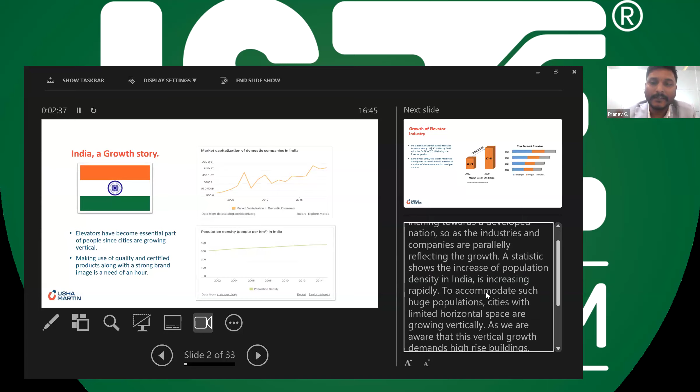All of us are aware that India is inching towards becoming a developed nation, so industries and companies are also growing parallelly and reflecting that growth. A statistic shows the increase of population density in India is increasing rapidly. To accommodate such huge populations, cities with limited horizontal space are growing vertically. As this vertical growth demands high-rise buildings, elevators have become an essential part of people's lives. Hence, making use of quality and certified products along with a strong brand image has become a need of the hour, right? So here we want to show some data regarding the growth in the elevator market.

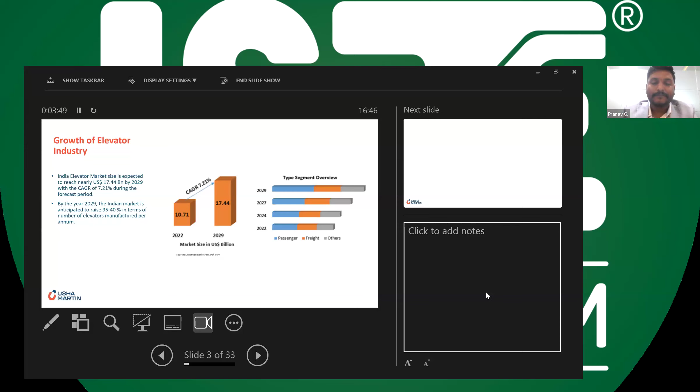Here you can see that in 2022, the market size was estimated at 10.71 US billion dollars, whereas in 2029 it is projected to be at 17.44 US billion dollars. So there is huge potential in the elevator market industry, and that introduces more and more players, resulting in competition in the market. If there are more players and more competition, the market tends towards cheaper products. So we have to see whether we are using a product which is reliable, quality tested, and safe in our elevator system.

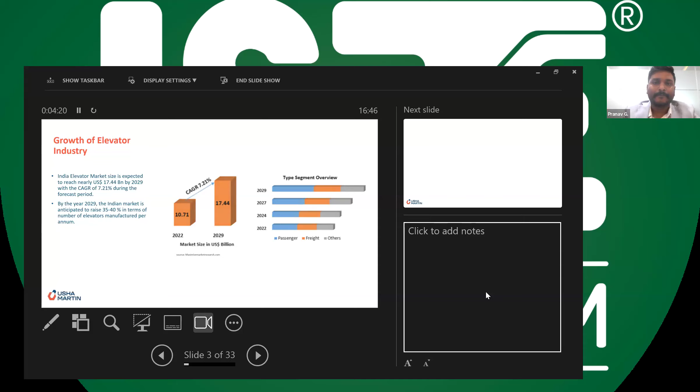So for that reason, we are here to educate you, to make you aware what to see about wire rope, how wire rope has to be identified, what particular applications need to be checked if I'm going for a certain construction of wire rope, a certain characteristic of wire rope. So here I have made one slide showing number of mishaps due to elevators. It's our moral duty to make you aware on safety product, that is wire rope, especially in steel wire rope and elevators.

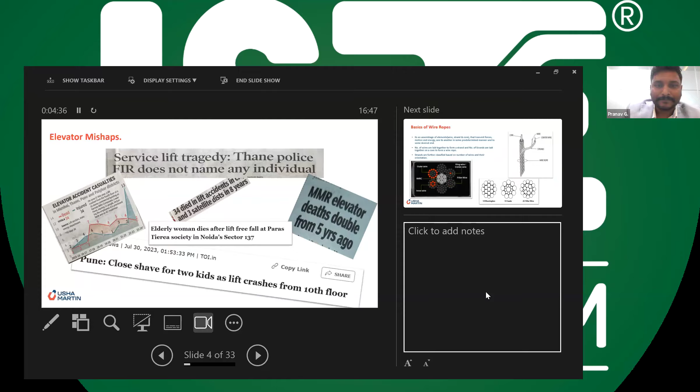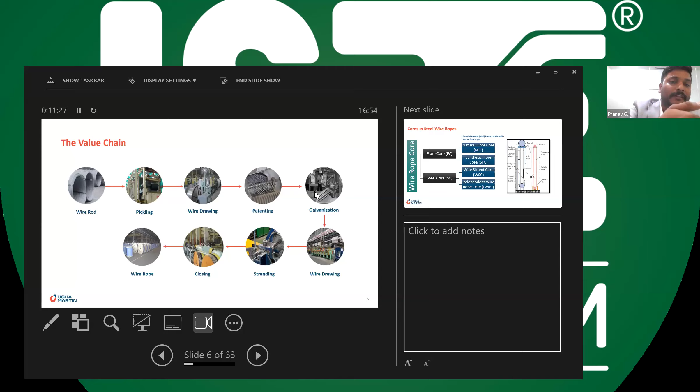As I mentioned earlier, strand is made up of wires. These wires are laid into a machine known as a stranding machine, and we get a strand out of that machine. Based on requirement, let's say I need an 8-stranded wire rope, so I need 8 strands and a core. Once I have 8 strands, I take these strands to the closing process, where we lay these strands over a core to make the final product, that is the wire rope.

So why have we given this particular name, the value chain? Because if there is a single mistake or deviation in any of these processes, the desired output is not up to the mark, or what we call a quality product. Over the years we have gained experience ensuring that in each and every process the required parameters are checked and met with the concerning governing standards, and we ensure that the wire ropes manufactured are of top quality.

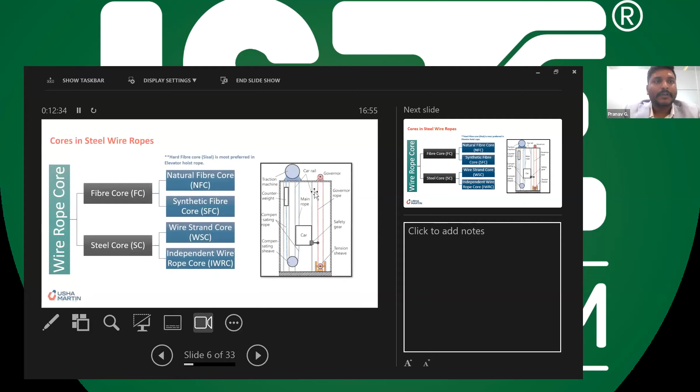Coming to the next topic, that is core in steel wire rope. As I mentioned in the very first slide, the core is the central part of your wire rope. There are two types of core: fiber core and steel core. As the name suggests, fiber core is made from fiber, and steel core is made from steel wires.

Fiber core is further categorized into natural fiber core and synthetic fiber core. Natural fiber cores are those made from naturally available plants like sisal, manila, and jute. Synthetic fiber cores are the artificial ones like polypropylene, polyamide, etc.

The other type is independent wire rope core, that is IWRC. So you must all have encountered this.

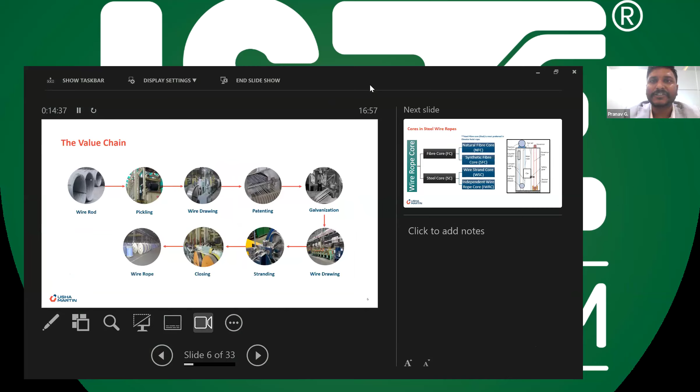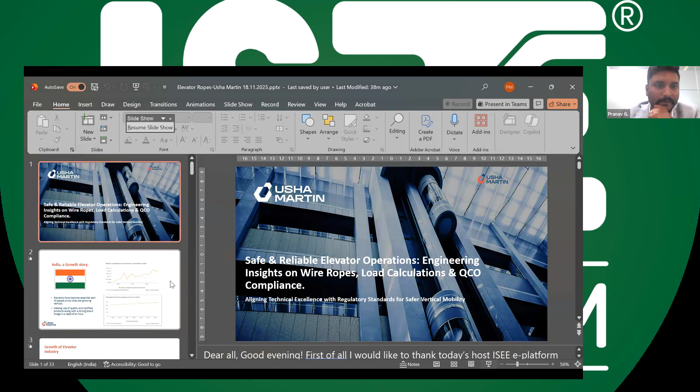I think the slide went off. Once you're sharing it now, Pranav, just try to make your screen a bigger view for the audience, because the view you're checking is a smaller version. Everybody may not be able to see the drawings and the structure there. Is this okay, ma'am? This way I can see the notes and everything there. Is there any option showing? Just a second, I'll check. I'll stop and reshare it. Yeah, choose that option. Correct. Let me share it once again. No problem, it happens, it's completely fine, Pranav. Not to worry.

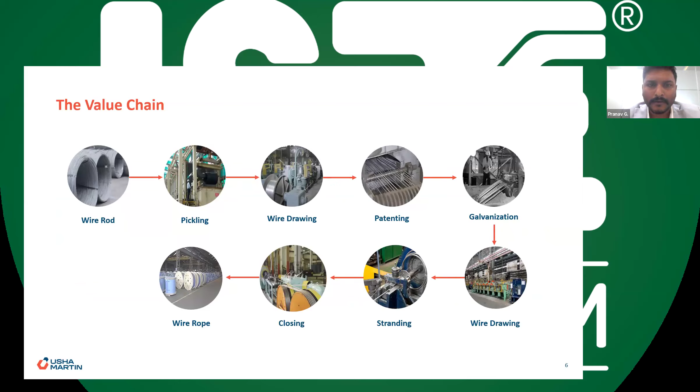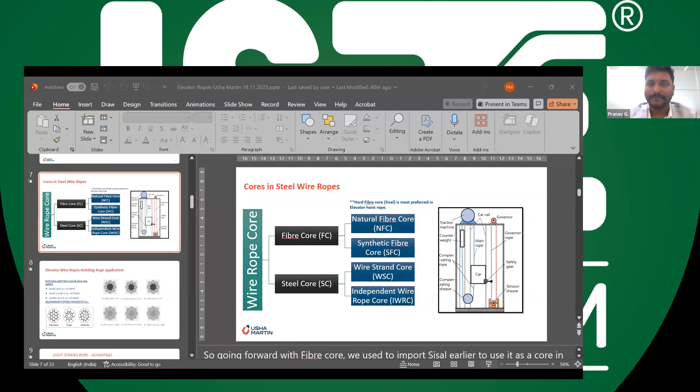Is my screen visible now, ma'am? Now it is visible correctly. Yes, now you can proceed with your presentation notes, go ahead with whatever presentation you need to do. Is it okay? This is fine. You need to press the slide show button, I think it's the extreme right button, just a second. Or you can go in the view also. I'll go with another view. I think this one, yes. Now you can press the arrow keys to go to the next slide. Correct, yes you're right.

So I was talking about fiber cores, types of fiber cores used in elevator wire ropes. Natural fiber cores come from jute, sisal, manila - these are plant-based fiber cores, and cores made from jute, sisal, manila are categorized under natural fiber cores. For synthetic fiber core, which are artificially made or man-made, polypropylene, polyamide, polyethylene - those types of cores come under synthetic fiber core.

Coming to the steel core, it is also categorized into two parts: wire strand core and independent wire rope core. Wire strand core is nothing but if my wire rope has a core which is similar to the strand, we call it a wire strand core.

Independent wire rope core, or IWRC.

Coming to the natural fiber core part, earlier we used to import sisal from various countries to make the fiber core or natural fiber core, particularly for our elevator wire ropes. But looking at the quality requirement, we did backward integration and are now self-sufficient, producing our own natural fiber core, that is sisal fiber core.

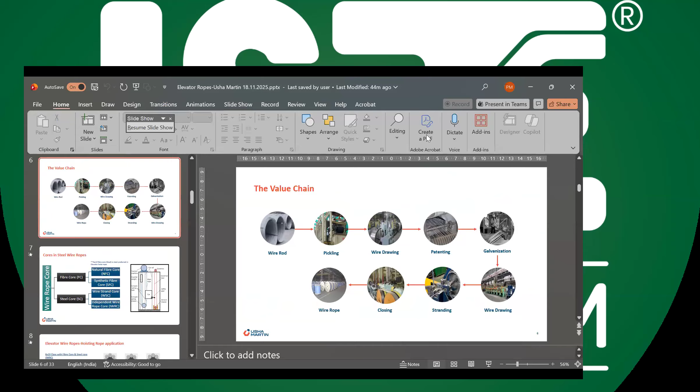Use any arrow button, Pranav. Yeah, it should change the slide. Just a sec, just a sec. Can I just reshare? I think I'm facing some glitch here. Yes, you can reshare, no problem. It should just run from the first slide or the last slide which you shared. Or if you wish to share the slide with me, I can share it from here.

Yeah, this was the slide.

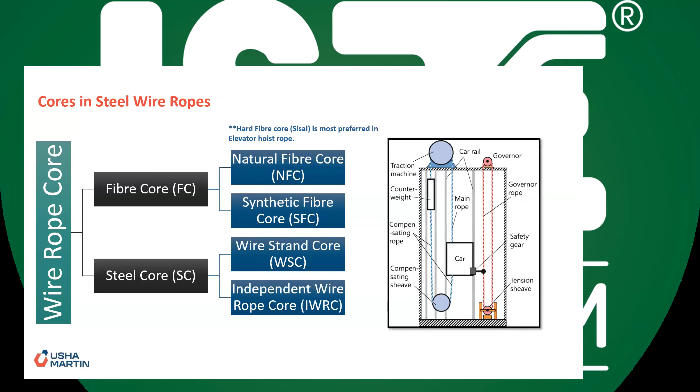I'll share my presentation with you. I'm facing some glitch, ma'am. No problem, please send it to me. I'll have it shared. Everyone, please be patient. He will be sending the slideshow to me, and I will share it from my end here. Please be patient and please be available.

You send it to me, Pranav. Yeah ma'am, I have shared the slide with you on email, I'll check. Just hold on please. I'm retrieving it from my email. Just hold on, you shared on the email, right? Yes ma'am. Okay, just hold on. I haven't received it as of now. I'm waiting for it.

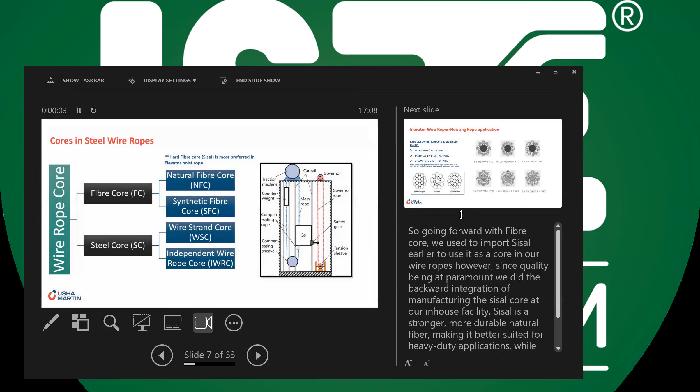There is some technical error happening at Pranav's end. He's trying to share this presentation with me. I haven't received it on email as of now, waiting for it. Pranav, you have shared it with me on email, right? Yes ma'am. The file is pretty huge, I'm yet to receive it.

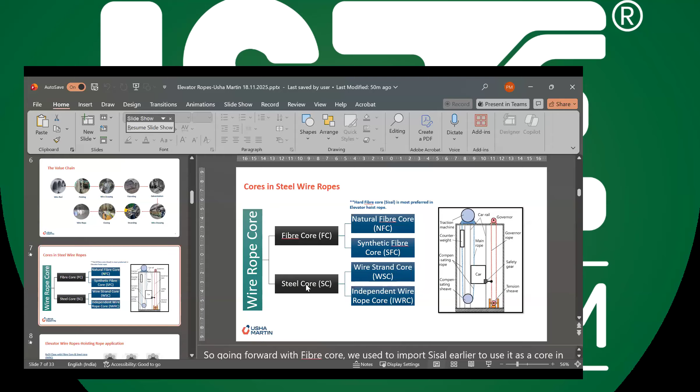I hope it is working, ma'am. I think so. You can go ahead with it. Is it going okay now? Yeah, okay, sorry for the interruption.

We do recommend using 8 stranded wire rope, especially for hoisting applications, because we have seen people using 6 stranded wire rope in place of 8 stranded wire rope. Although standards do recommend making use of 6x wire ropes particularly in hoisting application, based on our experience, we always recommend using 8 stranded wire ropes in place of 6 stranded wire ropes, especially for hoisting application.

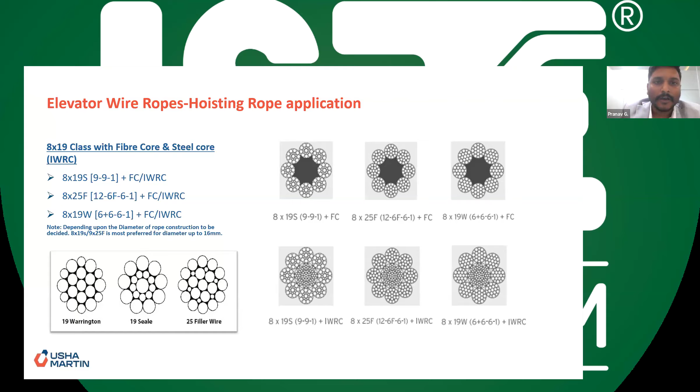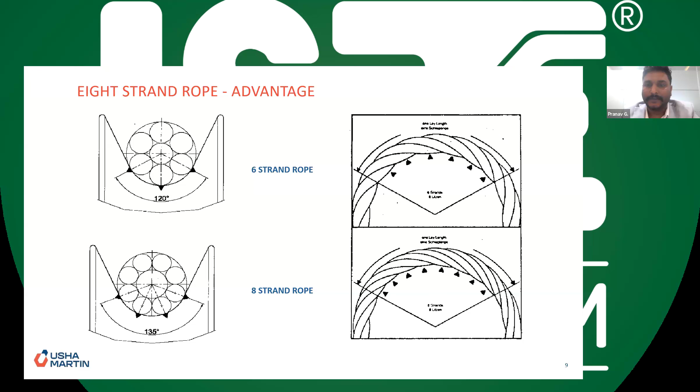Coming to the next, that is 9 stranded wire ropes. So we have seen 8 stranded wire ropes performing in hoisting applications, with your fiber core as well as with your steel core. But we have introduced 9 stranded wire ropes especially for the domestic market, because we are having successful performance, as we have already successfully tested this 9 stranded wire rope especially for your high rise buildings in the export market.

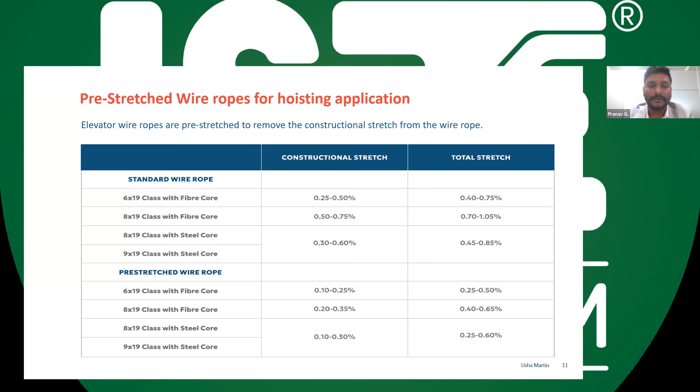Now coming to the safety factor for load calculations, I would like to give a disclaimer regarding these formulas. All these formulas are available in IS 17900. I have also mentioned the source from which I have taken this formula, so it will be easier for you all to access those standards, to go to those formulas, to understand them, and then to calculate the load calculations or the safety factor calculations in your elevator system.

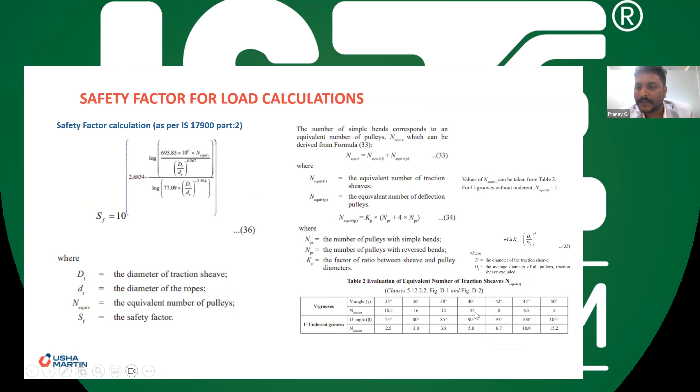I have also shown some examples from the same IS 17900 for better understanding of how these formulas work. Here you can see the first example in which there are two pulleys, one deflection pulley. They have given that the angle of the pulley is 40 degrees, and N equivalent is 10, because for V grooves especially we have to consider this 40 degree angle. So the N equivalent against a 40 degree angle is 10.

Kp is again the formula of diameter of traction sheave to the average diameter of all pulleys. Here the diameter of the traction sheave is 600, and the average diameter of these two pulleys is 500, raised to the power 4, which comes to 2.07. Then N equivalent P, which is kp into Nps plus 4 into Npr. Putting all the values into N equivalent P, we get N equivalent to be 14.14.

Similarly, you can do the calculations for this type of system as well as for this type of system. But to make things simpler, because these safety factor calculations are quite complex...

IS 17900 also states that if you are calculating safety factor for your elevator hoist rope, you can consider it to be 12 -- the minimum safety factor for your elevator hoist rope is 12. And if you are calculating factor of safety for your OSG, overspeed governor rope, it should be at least 8. This is a much simpler way to consider the factor of safety, and based on this we can proceed for our load calculations based on the selection of number of wire ropes into the system.

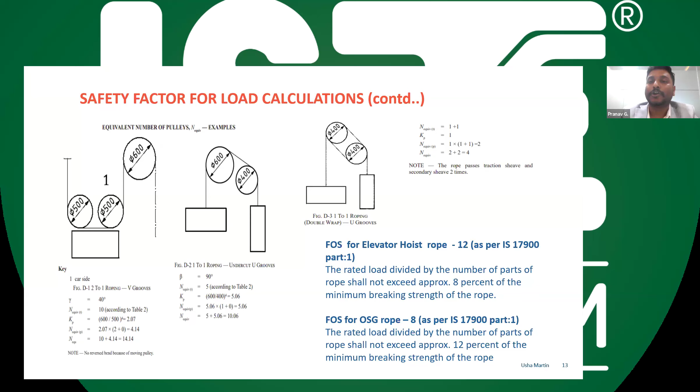Which type of wire rope to be selected, construction wise, core wise -- these factors of safety do help in selecting the right type of wire rope for your hoist as well as for your overspeed governor rope application.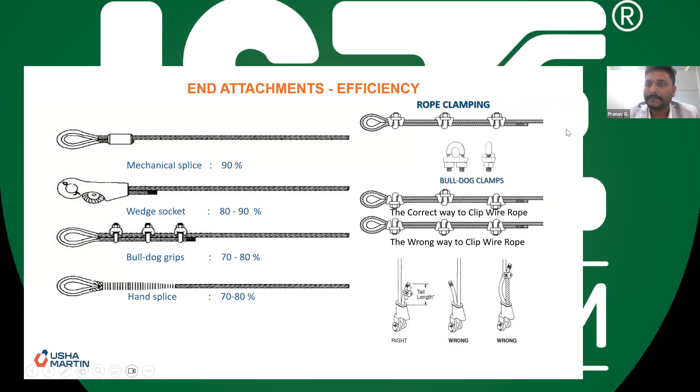Then coming to the next part, that is cutting of the wire rope. We have seen that many times people follow wrong practices, especially for cutting wire ropes. It seems like a little thing, but improper cutting procedure may lead to induction of looseness into your wire rope, which may further deteriorate your wire rope geometry, which may make the wire rope fail in its early days, or not give the expected service life.

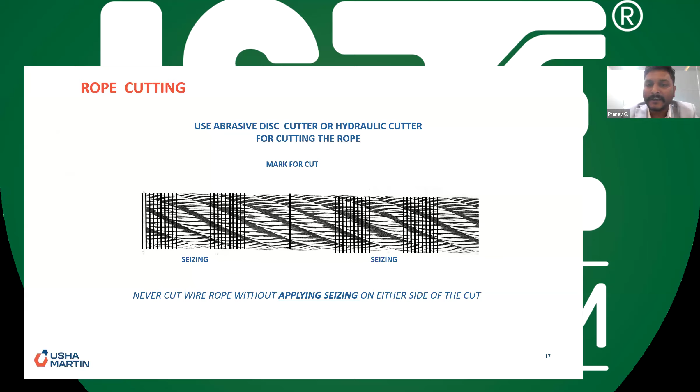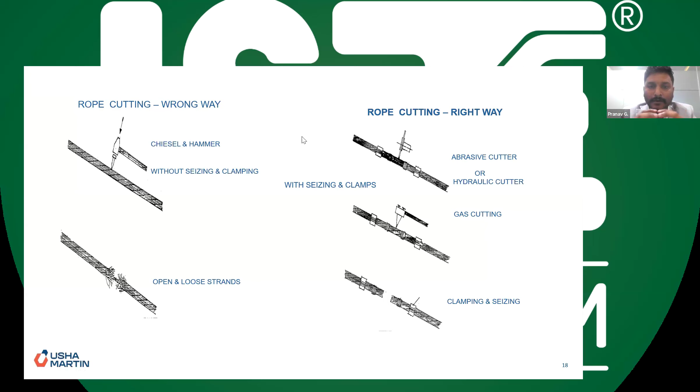So here we have shown the wrong way as well as the right way of cutting a wire rope. We have seen people using chisel and hammer to cut the wire rope, which is absolutely wrong. We request people to please refrain from using these wrong methods. You should use abrasive cutter, hydraulic cutter, or even gas cutting. But prior to cutting, you need to make sure that your wire rope has been clamped or seized at both the sides from where you are aiming to cut.

So for seizing of the wire rope, here are a few recommendations that we generally recommend based on our experience. For diameter of wire rope ranging from 8mm to 24mm, you can use 1mm wire. That wire should be annealed wire, soft wire, commonly known as binding wire. And the recommended seizing length is 2 times diameter, or minimum 10 wraps.

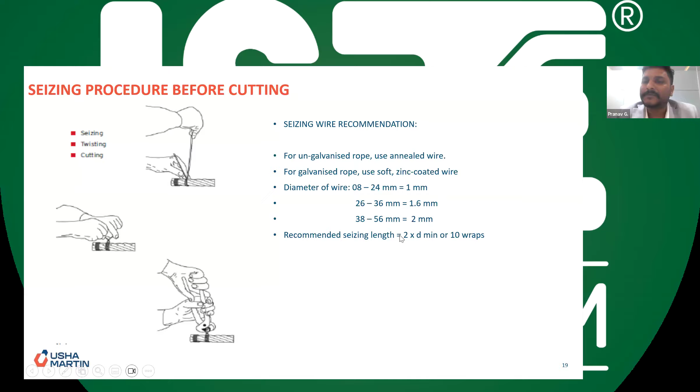People do ask me whether it is recommended to relubricate elevator wire ropes. So yes, our answer is yes, it is mandatory to relubricate elevator wire ropes. As you all are aware, the wire rope is constantly in contact with steel - your sheave grooves, pulley grooves, and various contact components. So you must have seen that the wire rope surface gets dry as the wire rope serves for a certain period of time.

If you notice that your wire rope surface is getting dry after a certain period of time, the wire rope is telling you that it's time to relubricate. But whenever you are relubricating, make sure there is no excess lubricant applied, because excess lubricant increases the chance of slippage of the wire rope on your sheaves.

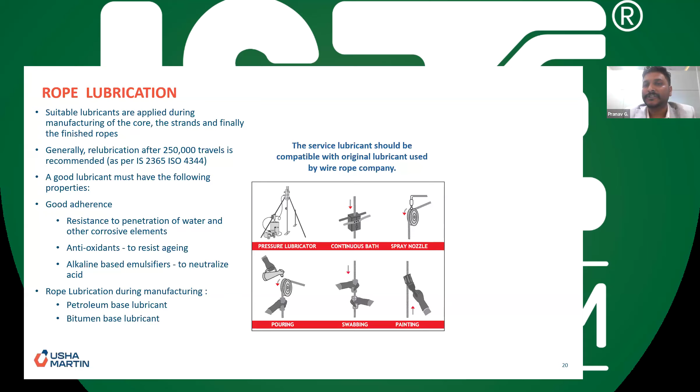What is the recommended type? You can use swabbing or painting type of procedure to apply the fresh coat of lubricant on your wire rope surface.

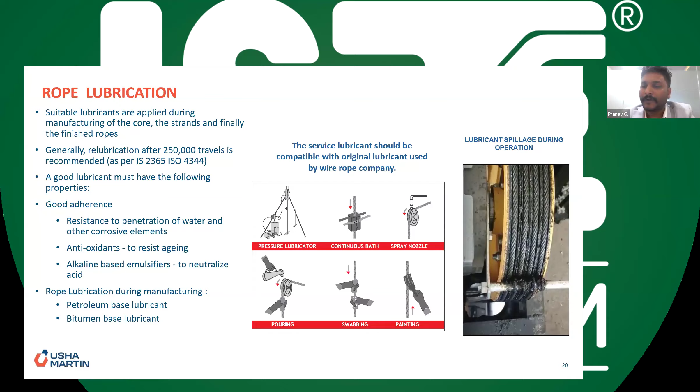Sheave grooves play a vital role in extending your wire rope's service life, because if your wire rope is working on a worn out groove or a groove that is not suitable for it, your wire rope tends to fail earlier than expected.

We have shown two types of grooves, narrow groove and oversized groove, that are not recommended for wire rope to work. The wire rope is recommended to work in a properly grooved pulley, somewhat around 6% recommended from your rope diameter. So rope diameter plus 6%, although the range is 5 to 10%, but for optimum service life we recommend 6% or 7%.

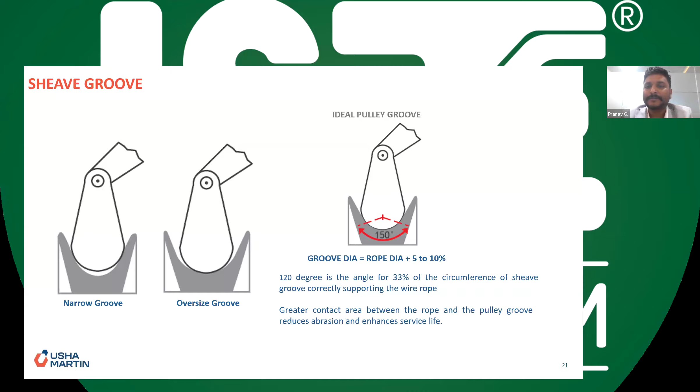You should also make sure your wire rope reel is covered with proper shade or cover, so it doesn't come into contact with the ambient or surrounding temperature. And you have to make sure your wire rope doesn't come into contact with the wet surface or floor. This is how you can store your wire rope.

If you're storing a wire rope for more than 3 months on a frame, you need to rotate it 180 degrees, because due to gravity there's a high chance that the manufacturing lubricant used in the wire rope may accumulate at the bottom of the reel. So you rotate it 180 degrees so the accumulated lubricant can repenetrate into the wire.

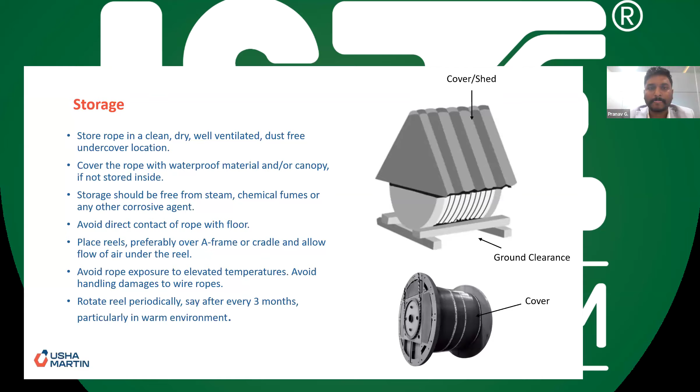Coming to the point of maintenance and inspection of steel wire rope and related parts. What do we need to check when we are particularly inspecting or carrying out maintenance of wire ropes in the elevators?

You need to visually inspect if there are any wear damages or deformation on your wire rope, or if there are any contact components that are not intact, just as I told you regarding the groove of the pulleys and the groove of the shafts. You need to check for the parts related to the wire ropes as well.

You need to check your end connections. You need to check the diameter of the wire rope when inspecting, which helps check if the wire rope has any deviations, any reduction in diameter, or any ovality into the wire rope.

Then you need to check the conditions of the grooves of sheaves and pulleys. If you feel the wire rope surface has become dry, you need to carry out relubrication of those wire ropes. Lastly, you need to check that all the ropes have equal or uniform tensions.

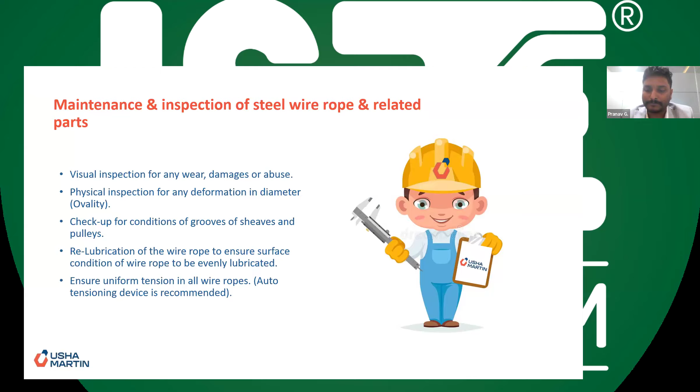Coming to the point, that is discard criteria for elevator wire ropes. We all are aware regarding replacement installation of wire ropes. We do carry out installation of wire rope, but it is very much necessary to identify that the wire rope has been qualified for discard, and there is a need to replace the wire rope so that the elevator will function safely. It is necessary to make sure we are safely discarding the wire ropes prior to having any unfortunate situations.

So there are a few criteria that have been set for discard of wire ropes. First is based on decrease in wire rope diameter. Whenever you are inspecting your wire rope, you need to check the diameter, and if you find that the wire rope diameter has decreased by 6% or more, then the wire rope should be discarded from service.

Secondly, based on number of broken wires. There is a high chance that when steel components are in contact, abrasion takes place, and when abrasion takes place, steel wires are bound to break or cut - we can call it wire cut. You can definitely encounter wire cuts in your wire ropes. So there are a few criteria based on wire cuts for when to replace or discard the wire rope.

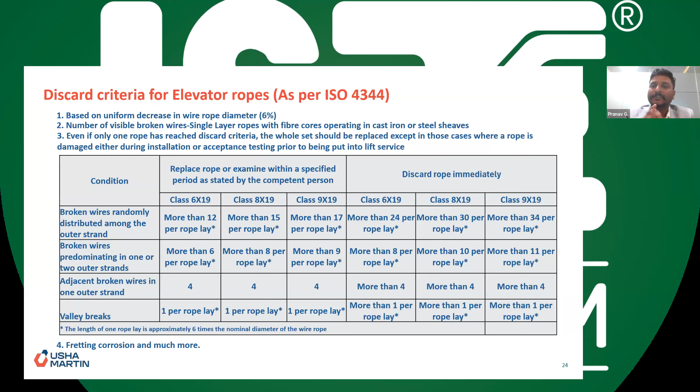If you are replacing a single wire rope or two, there is a high chance there will be distinctive behavior between the ropes which were replaced and which were not replaced. So you need to make sure that whenever you are replacing wire ropes, all the wire ropes in the system shall be replaced.

Now, for better understanding, we have shown some images on how to identify randomly distributed wires, or how to identify valley wire breakages. Here you can see crown wire breakages, which are those wire breakages predominantly seen on the crown of a strand. Here you can see the crown portion of a strand where wire breakages are seen, and here you can see the valley breakages, because these wire breakages can be seen near the valley between the two strands.

So if you identify any of these wire breakages, you can simply follow the discard table which is mentioned in IS 2365 or ISO 4344.

Here you can see this type of failure is due to shock or jerk load during operation. How do we identify that a wire rope has experienced shock load or jerk load? You can see that in all the ropes, the deformation or protrusion of wires is seen at the same or similar location. This itself suggests that the wire rope has been subjected to some external influence which has distorted the geometry of the wire rope at a single location in all the wire ropes.

Here you can see bird caging type of deformation, also known as basket deformation. Then here you can see mechanical damage. This particular component is in contact with the surface of the wire rope, which has resulted in crushing type of damage into the wire rope.

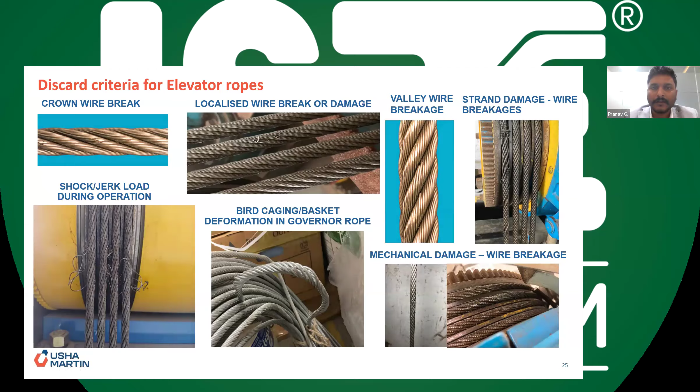Then what do QCO guidelines say? We have seen many wire ropes, especially those imported from China, which used to make use of jute core. As I have already made you aware, the standard suggests that whenever you are selecting fiber core, especially for hoisting application, you need to make sure that the natural fiber core should be a hard natural fiber core, such as sisal or manila. But most of the time, we have seen that people were using jute core.

So those particular wire ropes were not providing the expected safety checkpoints, what we call safety points. For that reason, the Government of India has taken the initiative that whenever there is a requirement of wire rope in your elevator system, it should comply with the IS 2365 specification, or its latest version, and be supplied with BIS marking. So these QCO guidelines have added a safety check post for better and safer working of your elevator wire ropes.

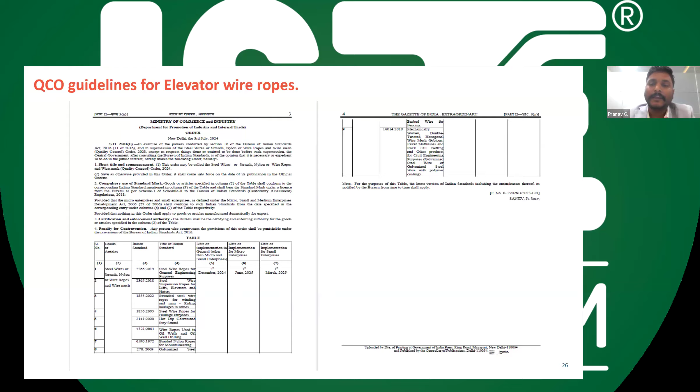Now, coming to the strength of Usha Martin, why we always say you should go for Usha Martin ropes: we have a contracted steel plant, our own design center in Italy, and advanced wire and rope making plants. All these cumulatively help us make a superior product, a quality product, a certified quality product, which ensures that whenever our product is in your system, you can trust our product, you can trust our ropes, and in fact the user can trust our rope.

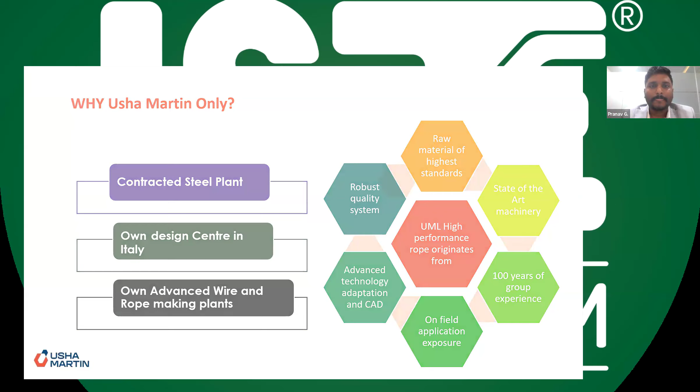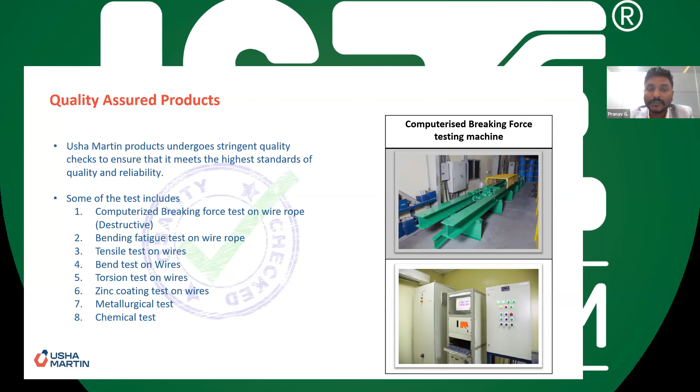You can see the computerized breaking force test on wire rope, which comes under destructive testing. We do not rely on calculation-based or aggregate testing of wire rope; we rely on destructive testing, which gives the actual result, actual tensile, and actual breaking force at which the wire rope breaks, or the actual strength of your wire rope. Then there's bending fatigue test on wire rope, tensile test on wires, bend test on wires, torsion test on wires, metallurgical test, and chemical test. All these cumulatively depict the in-process testing of our product.

Now coming to the point, that is the USP of Usha Martin. So why Usha Martin? What are the USPs? We are very proud that we are the only wire rope company in India to conduct in-house reverse bend fatigue testing on wire rope.

We also have design excellence, with our own design center in Italy. We manufacture a wide range of wire ropes from 3 mm to 160 mm. We have an in-house pre-stretching facility, which helps us deliver pre-stretched wire ropes to customers, relieving them from the initial hassle of re-leveling the wire rope.

We also have a pan-India network of regional offices and channel partners, so we can provide just-in-time support as well as service support for speedy requirements. We also have an in-house NABL accredited laboratory, the only wire rope company in India to have this. So all products tested at our factory are NABL accredited tested products, we can proudly say.

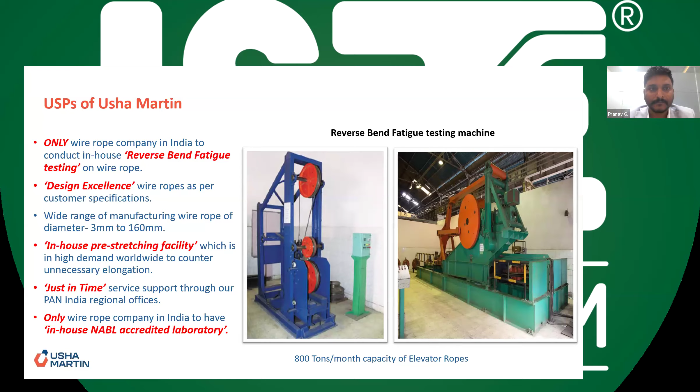I would also like to highlight that we are the only company in India with an API monogram license for steel wire ropes.

I would like to thank you all for listening patiently and showing your patience, because I know there were a lot of technical glitches and disturbances in between, but I appreciate all of you for showing patience and listening carefully. I hope this session has made you more aware regarding usage of steel wire rope, how wire ropes are to be identified, and how they are to be handled. I hope this was an informative session for all of you, and I would like to hand it over to Shitija ma'am for the Q&A section.